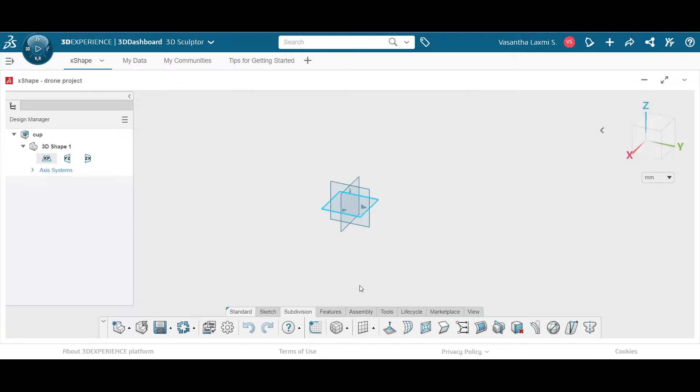For the cup model, I'm selecting primitive subdivision cylinder from the subdivision tab and dropping it at the origin. You can see the preview. Here I'm setting the number of loops for couple direction: stack from 3 to 6, and pie slices from 8 to 10. I'm also dragging the scale slider to the required size and clicking OK.

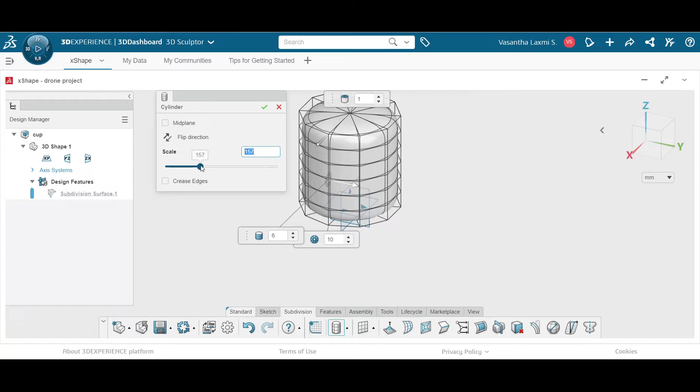Change the triad orientation to break a couple of faces down into smaller divisions, shapes that are more compatible with the object to make a handle. To do this, we'll be using the subdivision faces tool from the action bar.

Adjust two faces simultaneously. I'll drag the handle outwards to make the center larger and click OK. View it in isometric view to get the right orientation for selections.

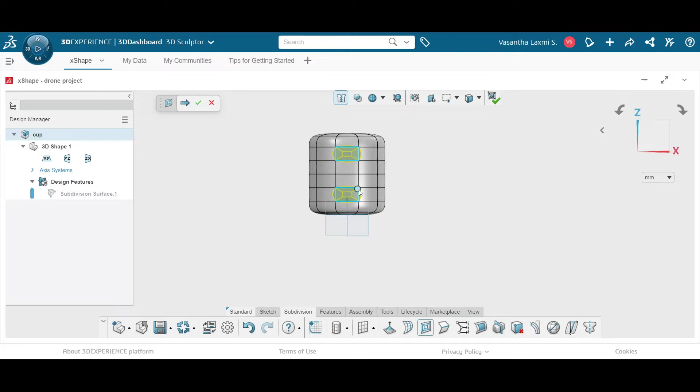Now I'm selecting these two faces for the extrusion process from the action bar and click OK. Repeat the same step for the extrusion faces so that we end up with a pair of extrudes.

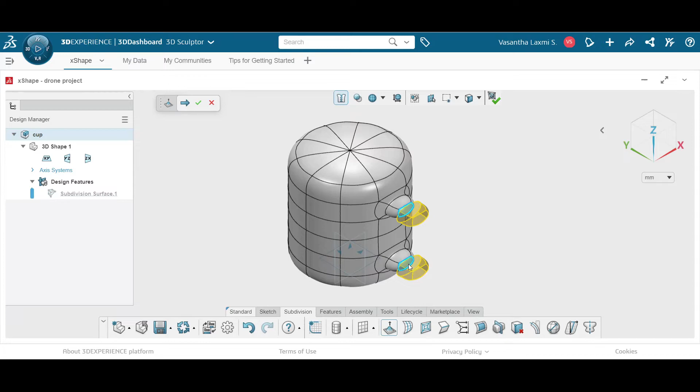To start forming the connection of our handle to the main body, lastly I'll select two opposite faces and click OK. You can see the connection of the extrusions.

The outer handle seems a little thick, so I'll select the outer rows of vertices and push them in a little, thinning the handle. Now from the action bar, selecting the arc bend, used to bend selected vertices with reference to the YZ plane.

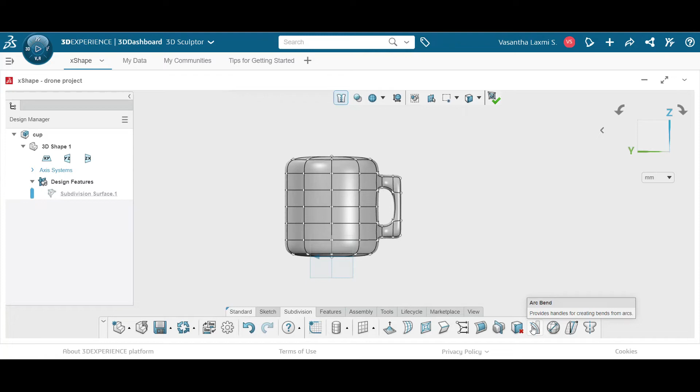When the line and arc appear, drag the handle at the end of the arc across the horizontal line to shape the vertices and click OK.

On top of the handle, I'm adding another extrude. Now I'll use crease to sharpen the edges of the cylinder on top of the model.

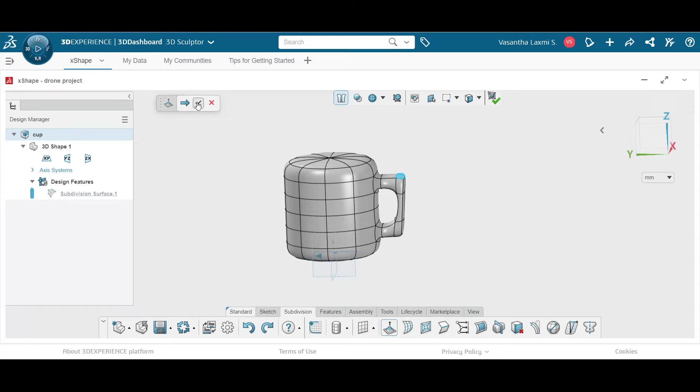You can see the slider, it can vary the sharpness of the edge. In this way, we'll repeat the same procedure by selecting the outer edges on the bottom. Here I'm sliding it up to 100 and click OK.

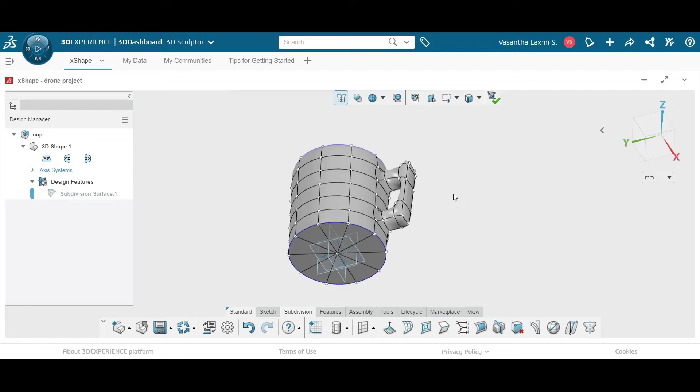So here now you can see we got the shape of the cup from the primitive subdivision cylinder. And now, by clicking Switch App, let's enter into XDesign for some finishing touches.

So here you can see now we are in the XDesign environment. Go to the Features tab, select the fillet.

Now I'm going to add a required fillet on the bottom edges. So select all the bottom edges and click OK.

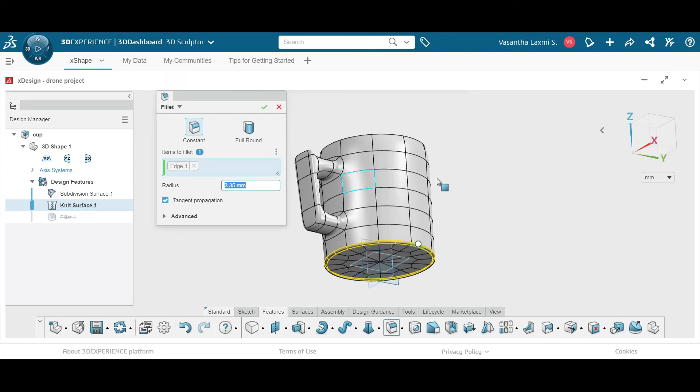Now I'm going to add a new sketch with reference to the YZ plane. Go to the Sketch tab, select the line command, and create the desired sketch, adding dimensions for the revolve cut feature. Trim all the extra lines and give all the required dimensions, making sure it's a closed profile for the revolve cut feature.

Now go to the Features tab, select the revolve cut, give the axis line and click OK.

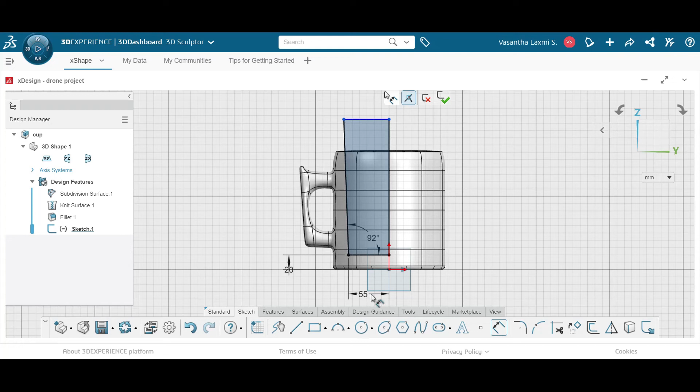Finally, now I'm going to add a full round fillet on the top edge by selecting all three required faces and click OK. And again, giving a constant fillet on the inner edge of the required radius and click OK.

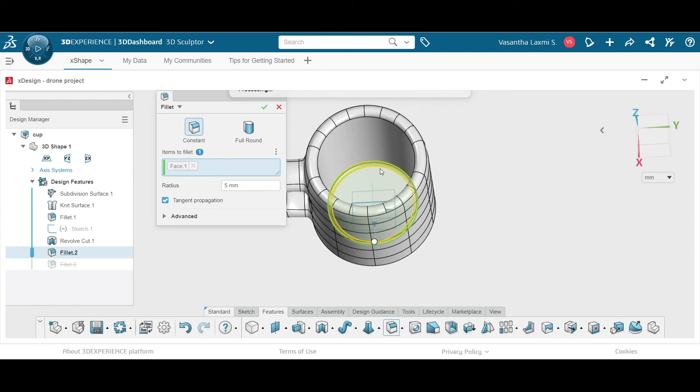Now go to the View tab and select the View Mode settings, and from the presets I'm selecting shaded surfaces of the geometry. And from the Tools tab, I'm giving appearances by selecting some color. This is optional.

So in this way we can create the models by taking subdivisional primitives from the XShape of 3D Sculptor.